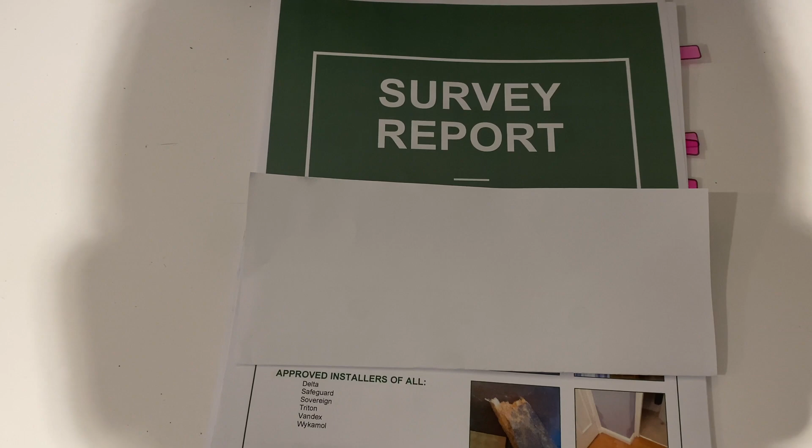So this is a copy of our client's report. I'm hiding the contractor's details because dobbing them in isn't what we're here for. It's quite a detailed report, 15 pages long. Just a few things we noticed before we've gone out to the property. First, they diagnose rising damp - overcome problems of rising damp, blah blah blah blah blah. And then a few other bits and pieces where my tabs are.

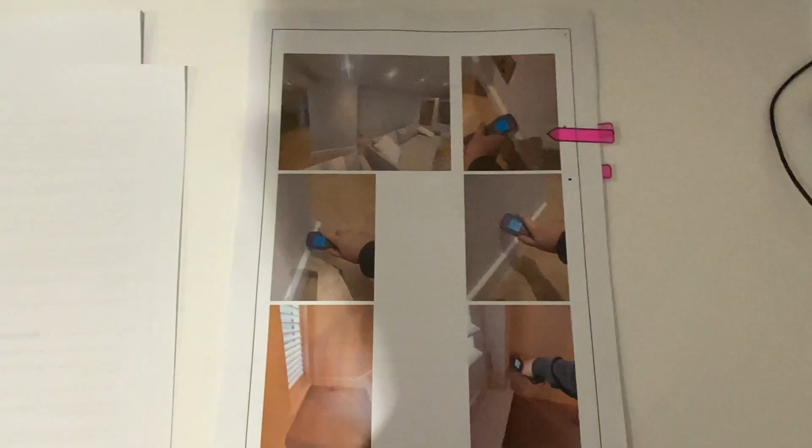We've got some photos where the chap's put pin probes in the wall, and he's got quite high readings on those pin probes, so that's cause for alarm. We need to look at that. What else have we got? A quote for rising damp remedial works.

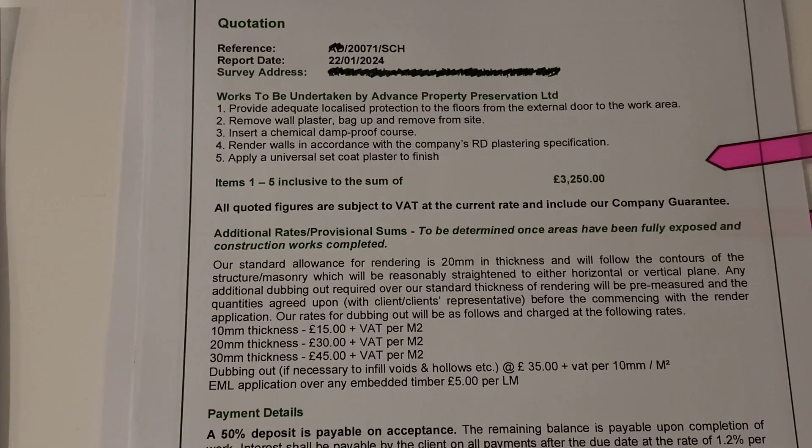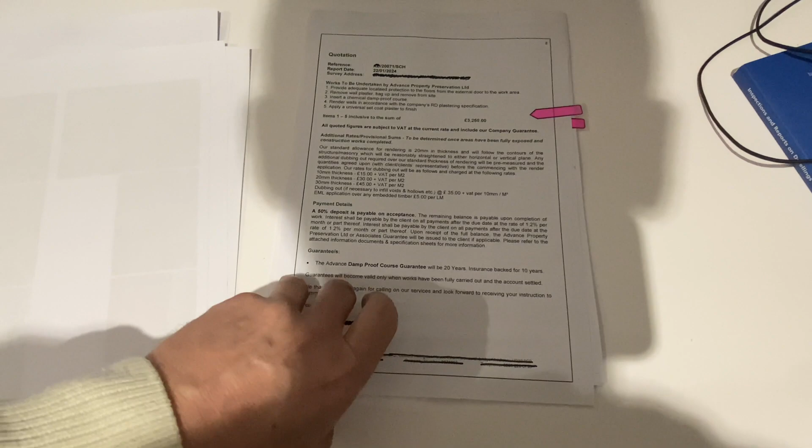So this is going to cost our client £3,250 plus VAT. Hang on, I've got a calculator here, my maths isn't that good. 3,250 times 1.2... £3,900. And on the final detail page, we're going to do a chemical damp proof course all the way through there and replastering. There's also 2 vertical damp proof courses going in, so we'll have a look at that as well.

So let's get to the property and have a look.

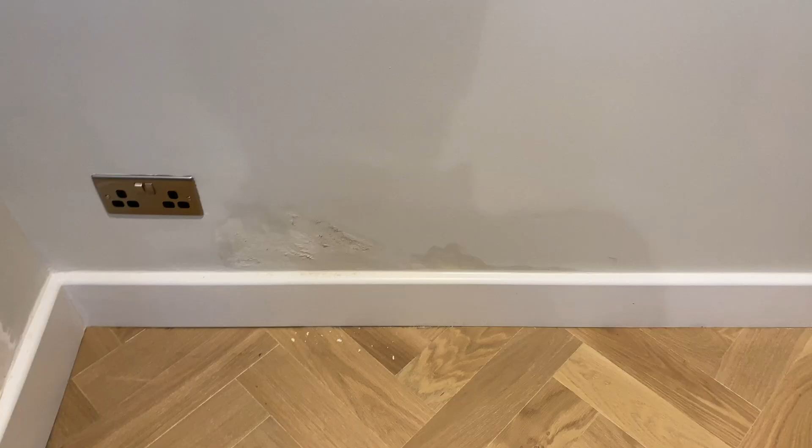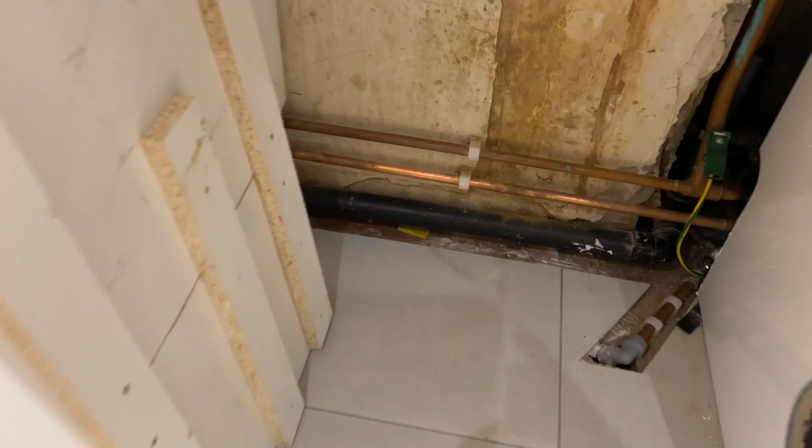Looking at a damp issue, low level, just in this location here. And someone at some point has come along, stuck pin probes in the wall, and it's revealed high levels of damp. And the other side of the wall, where the utility is, similar kind of issue.

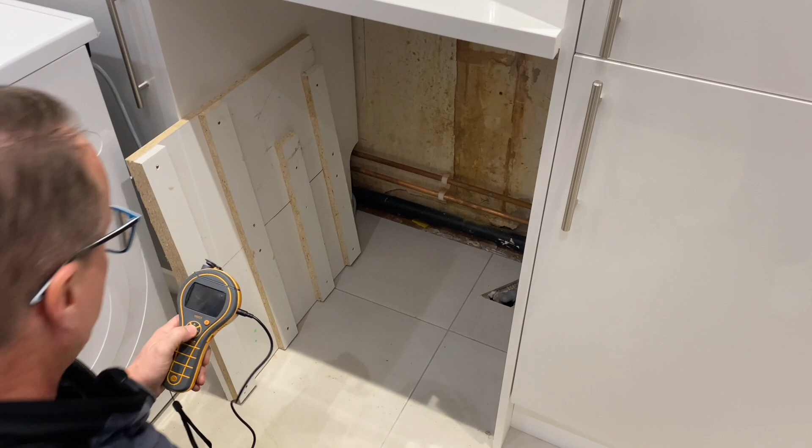So let's get the pin probes out, and we'll just start some general scoping about first of all. So let's get this turned on - pinless moisture meter. Okay, generally relatively dry, not too bad. Elevated, and then really quite high.

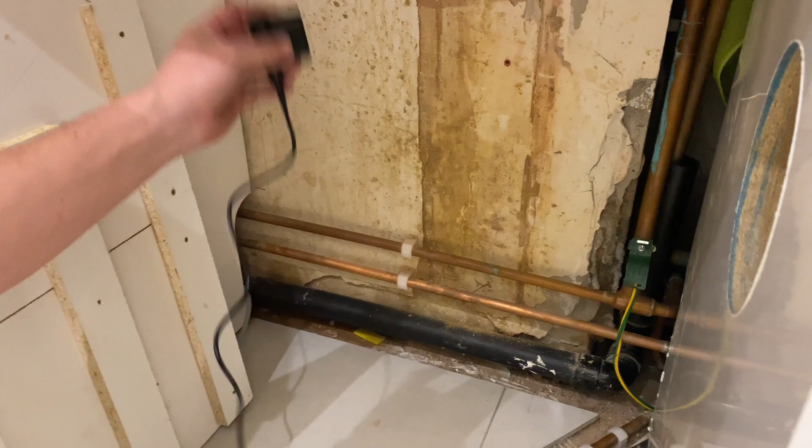So let's stick our pin probes in, see what kind of readings we get from those. Elevated, again elevated and really quite high. And there's quite low. The most accurate readings we'll get on these is when it's low, because there's no conductivity at all. This pipe work has been tested, so it's all leak free. But just as a little demonstrator here, this picks up electrical conductivity - if we put it on something that's conductive, it immediately comes up 100%. But I don't think that pipe's wet.

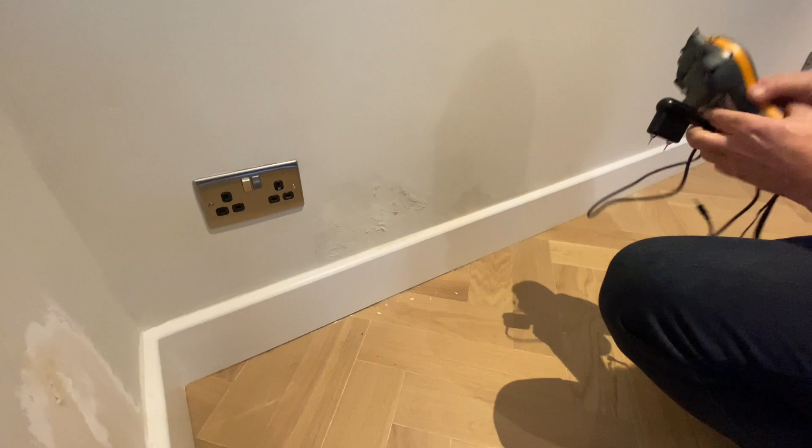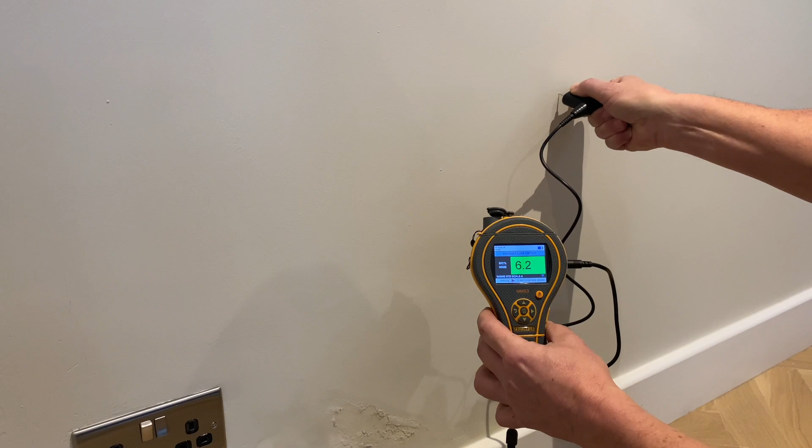So let's wander around to the other side, do a similar kind of thing. On the pinless moisture meter, an area we know to be relatively dry. Get down into this problem area here, and it's coming up very high. Again, really quite high, and on that side wall, again, really quite high. So we'll pop the pin probe on this too. Dryish area, not even picking up anything. And then down here where we've got all this wet, and on the side wall, someone's actually done a bit of a repair there - that's actually not too bad.

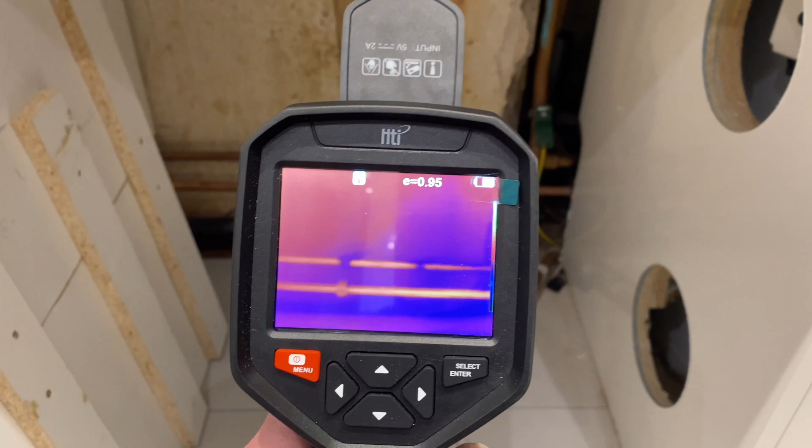Okay, so that's step one, just having a general scope about all that. Next thing we're going to look at is thermal imaging using this HTI HT-H8 thermal imaging camera. Just looking at it generally at the wall, we can pick up the gap there actually, and then the pipes, and we can see there's maybe a cooler area in the middle. So I'll get a picture of that and we'll store that picture.

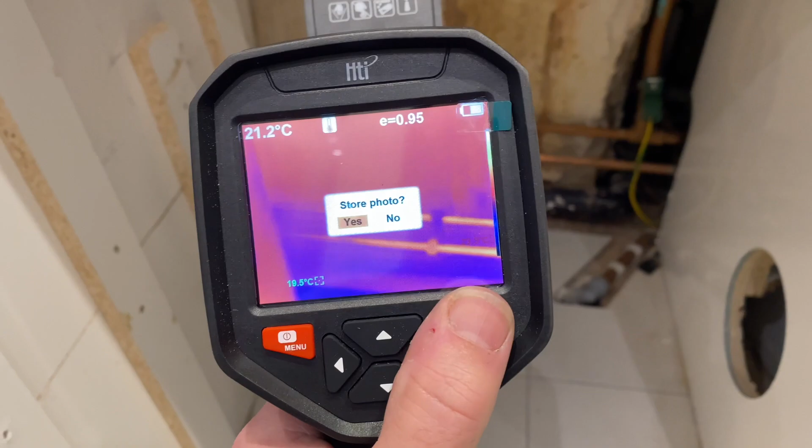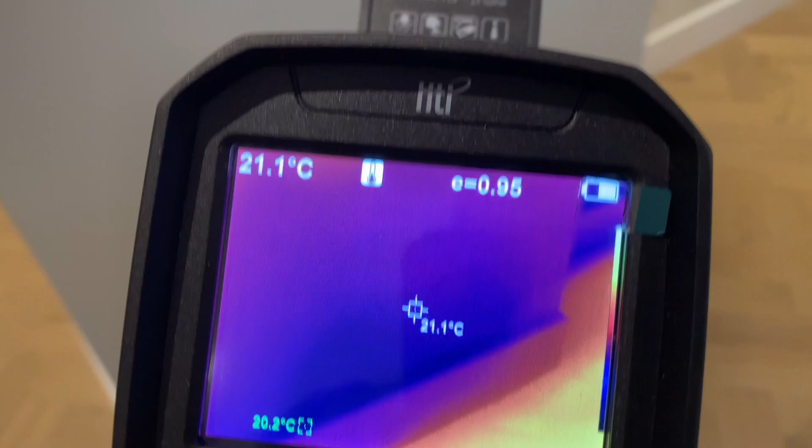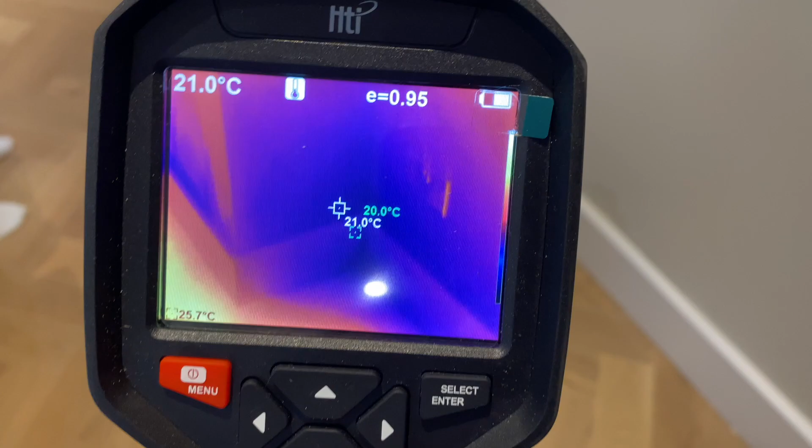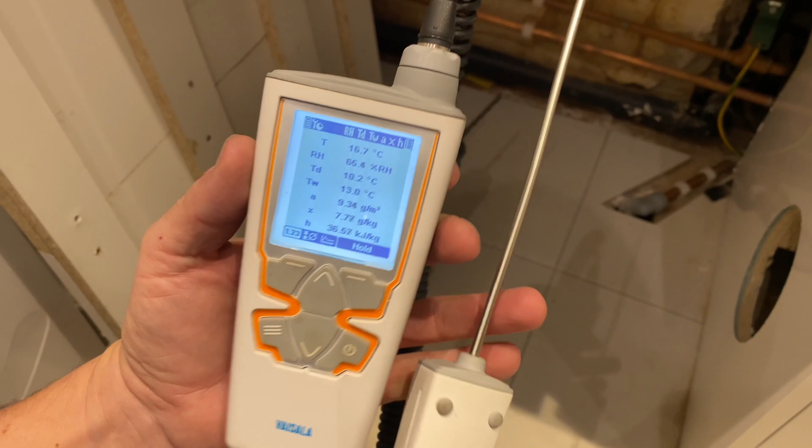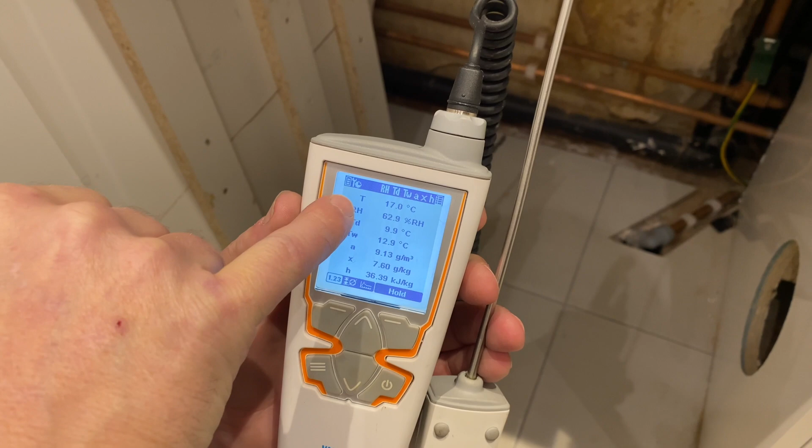Okay, so next step is to take some hygrometer readings. This is the air temperature, it's starting to just settle slightly. Obviously, the longer we can leave it, the better. But relative humidity is around 65% and falling at the moment. As I said before, our temperature is 16.9 degrees. Relative humidity is the humidity at, in this case now, 17 degrees. So at 17 degrees, our air can hold 62.8% of the maximum moisture it can hold at 17.1. Our actual moisture content is 8.97, so that's not going to change too much. But we'll drill into the wall and see what readings we get in the wall.

Pop this little seal on it, which seals around the opening. Do a high one.

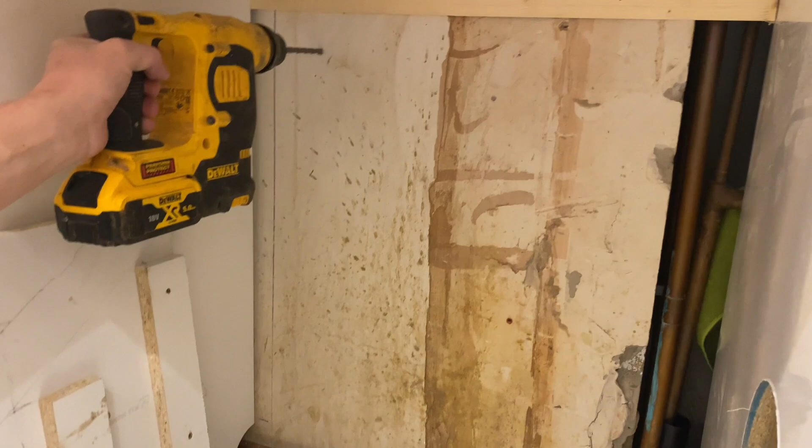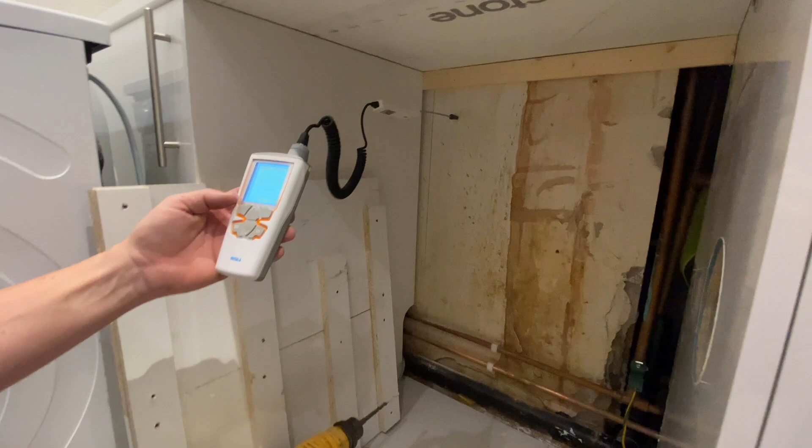Again, I'll do it in a couple of places, yeah.

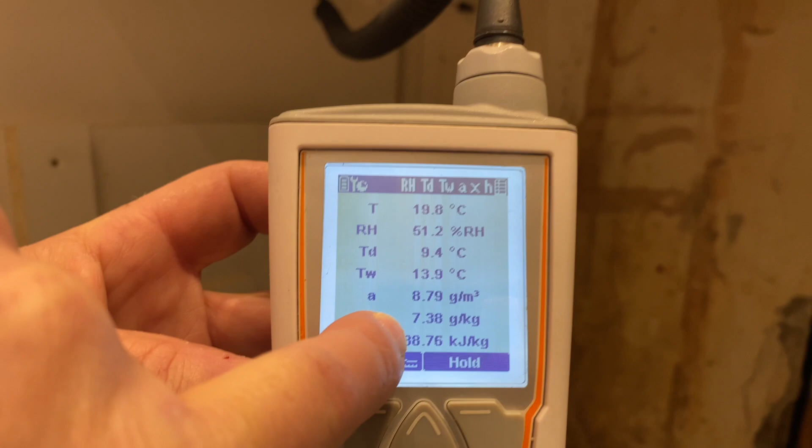So, readings at high level: we've got 19.8 degrees, holding 51.2% of its maximum moisture content. But down here it's only 7.38 grams per kilogram of air, which we consider dry. As you can see, that's up a little bit at high level, away from where we've got our issue.

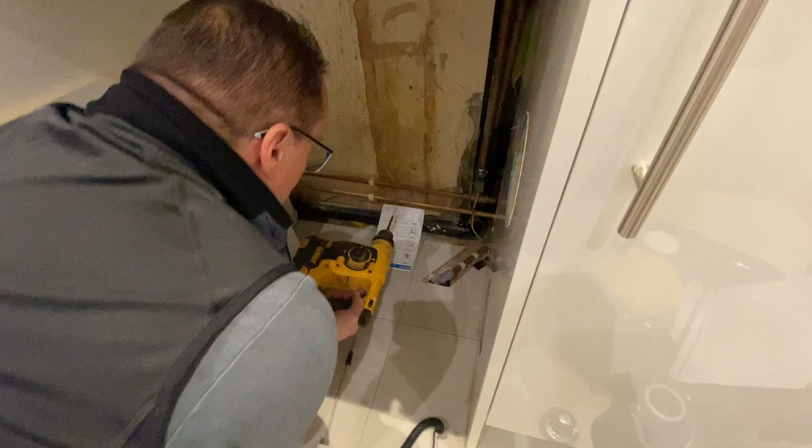So we'll now do the same at low level. Stop there, drill down to where we've recorded damp. Capture as much as I can for our carbide, and then we'll get the damp probe in there as well.

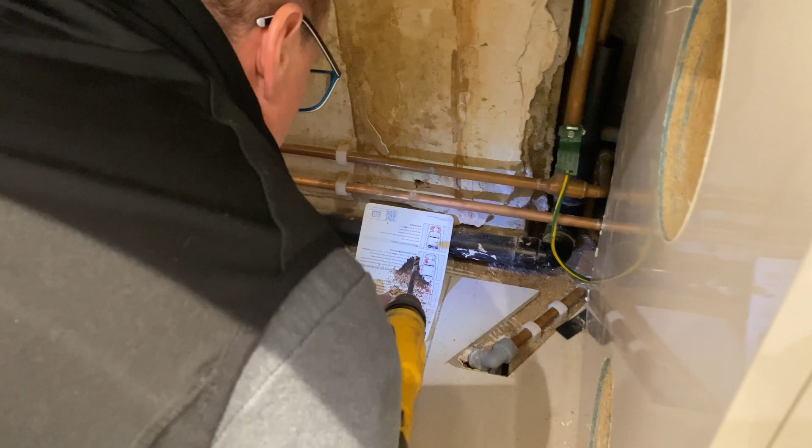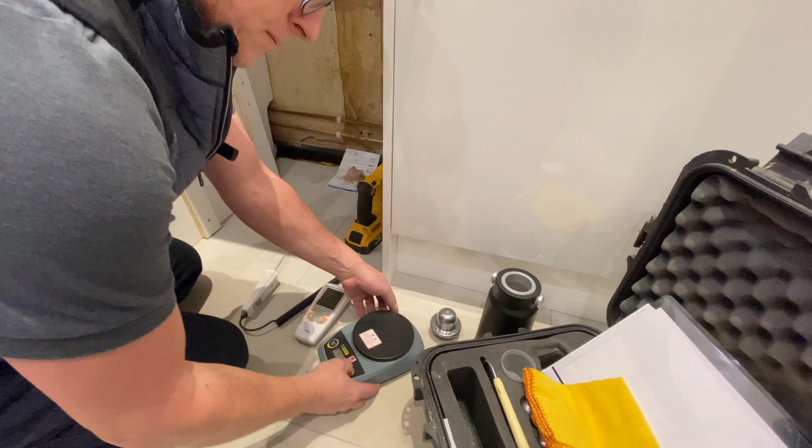Okay, so let's just check before I stop drilling. I need to check we've got enough dust for a start, so I need a 6 gram sample. Almost halfway there.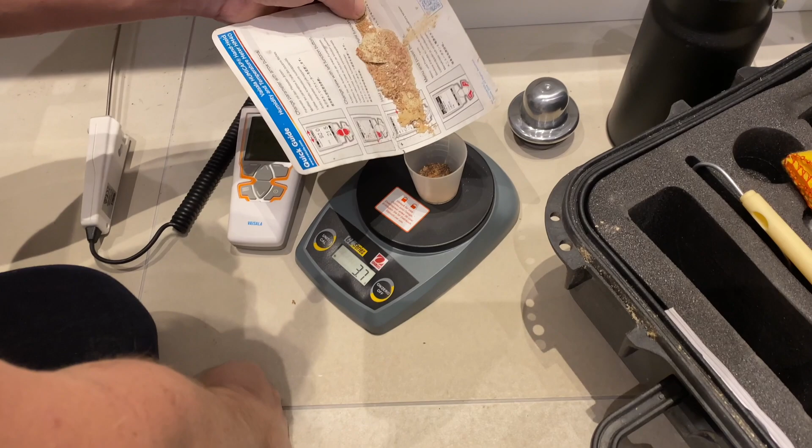What's coming out looks to be very dry and powdery, but the test will confirm it. It's 7 grams, that's plenty. So I'll get the hygrometer in there so we can see what that's recording.

Oh, come on. I think the batteries might be getting a bit low in this. Okay.

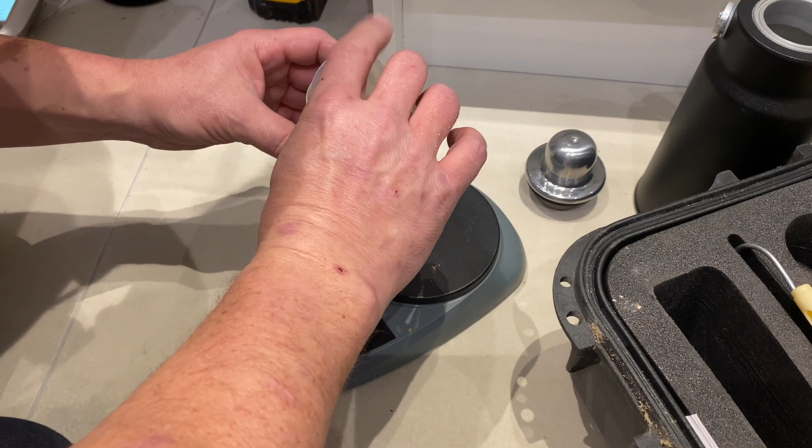So let's get our 6 grams in there. 6.6. 6.4. 6.2. 6.1, okay, pop that into our chamber.

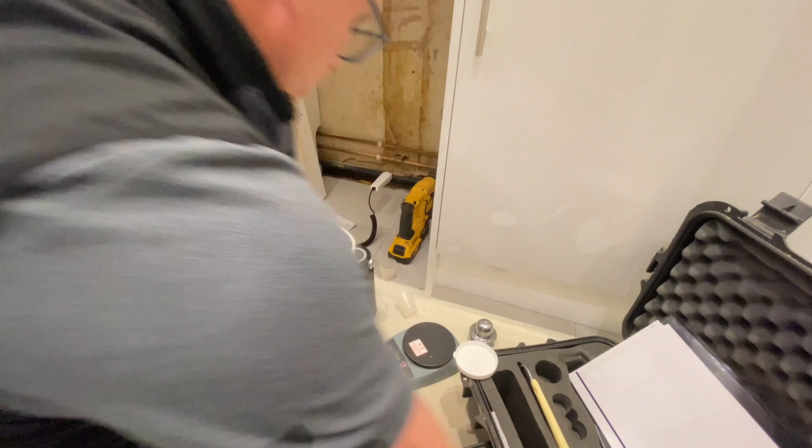Pop a couple of balls in there as well, steel pulverizing balls. And we'll do some scoops of carbide, which go in the lid, because the carbide reacts with the water in the sample and produces acetylene gas. And what that does is, if that starts its reaction too soon, we'll lose gas and get a false low.

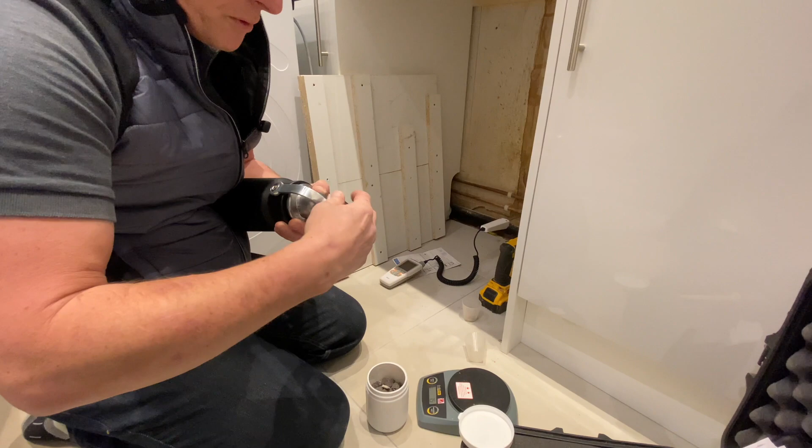So we've got the sample in there, carbide in there, get those in separate. Make sure that's done up. Lid on the carbide.

Okay, so I'm just going to leave that because this is the smaller chamber compared to the one we've done before. We'll get everything down in the lid, and so that starts to react.

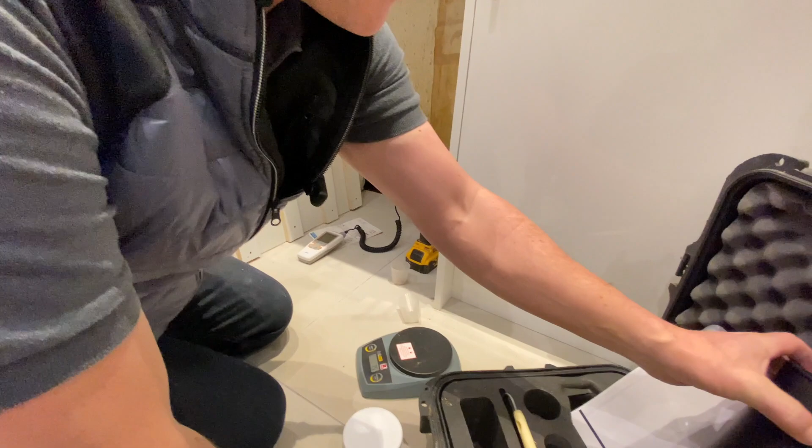But we'll flick over and we can see at a similar temperature, now we're up to 10.7 grams per kilogram. So it is slightly damper at the bottom for whatever reason, but our carbide test is going to give that as an absolute definitive.

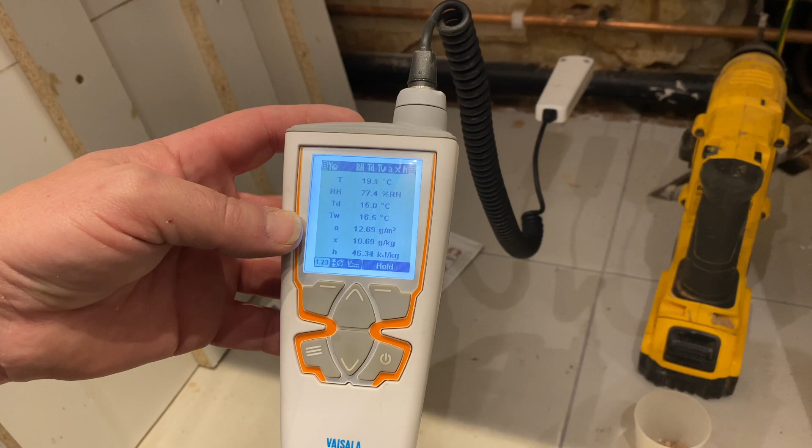So after 10 minutes, we can see our moisture content is 2%. It's a clay brick, I would consider that to be dry. And if we look at our actual sample, again you can see it's quite dry.

So we'll now do the same on the other side of the wall. Okay, so now we're doing the same on the other side of the wall. Let's go where it's at its worst.

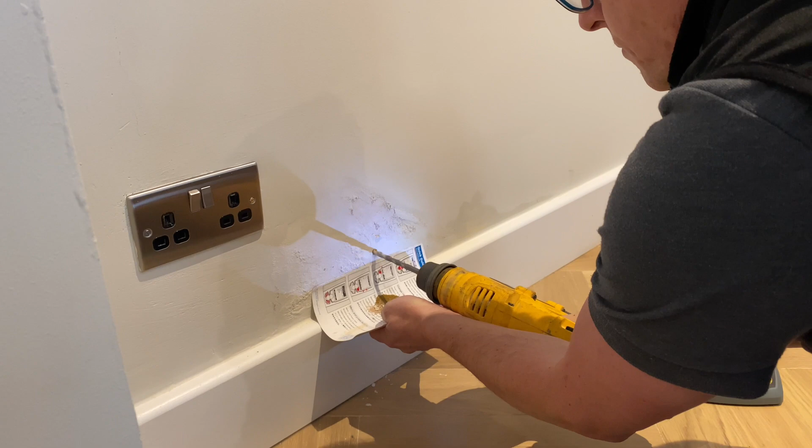Just keep that for a moment, I'll weigh it in a second. Let's just weigh it now. Okay, scales are zeroed. Oh, I'm only halfway there again.

5.9, a fraction more. There we go, 6 grams. Lovely, right, let's get that in the wall.

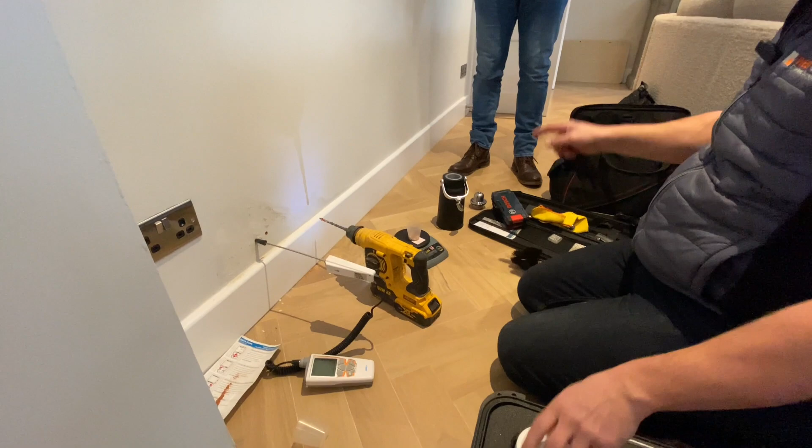Taking a reading while we're doing this. Why? Because 3 scoops of that equals 6 grams of sample, so it has to be exact.

So we put our sample in the chamber, and as it went in it looked absolutely bone dry again. Some crushing balls, and we've got to keep that separate, because if we put the calcium carbide in with that, it will start reacting straight away with any moisture.

Then it's not pressurizing the chamber because the pressure's coming out. So it should normally be 2 scoops of this, but because it's come in rock form, there's loads of air gaps, so I'll do 3. Some of these are quite big.

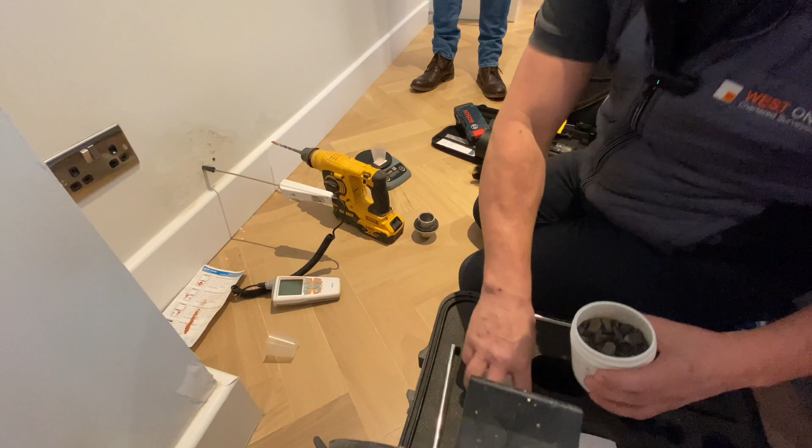I'll do 2.5. And then once you've pressurized it and you take the pressure off, you hear it as you release the pressure, and it absolutely stinks.

So we'll get that in there separate to that. Yeah, nice and tight. At the moment it's 0.

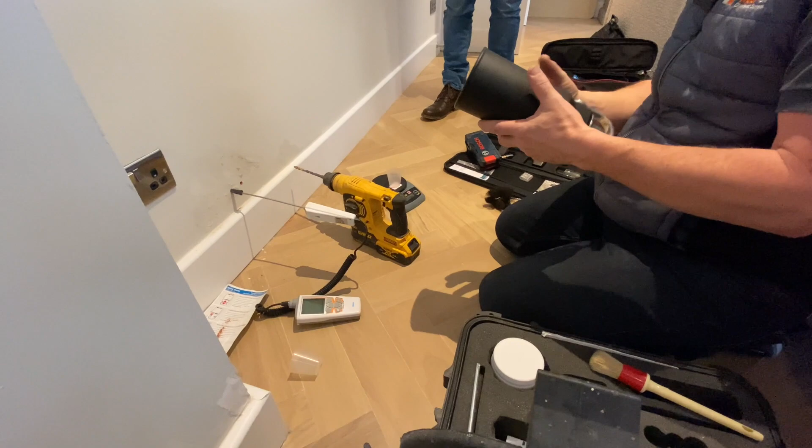Okay, and then we leave it. It's only a little, we've got 2 chambers. One's got a big bulb in the middle, so we can leave that flat because it'll settle in there. But because this one hasn't, you've got to leave it that way up.

I was wondering why you left it. I was on about it a minute ago. So it's all going to come out.

Yeah, so everything's exactly the same process that you used in there. Yeah, yeah, so you're just again measuring the amount of dampness in the brick itself.

Yeah, absolutely. And I'll send you a link, I'll do a YouTube video on this, because I find it interesting. I was only taking a minute.

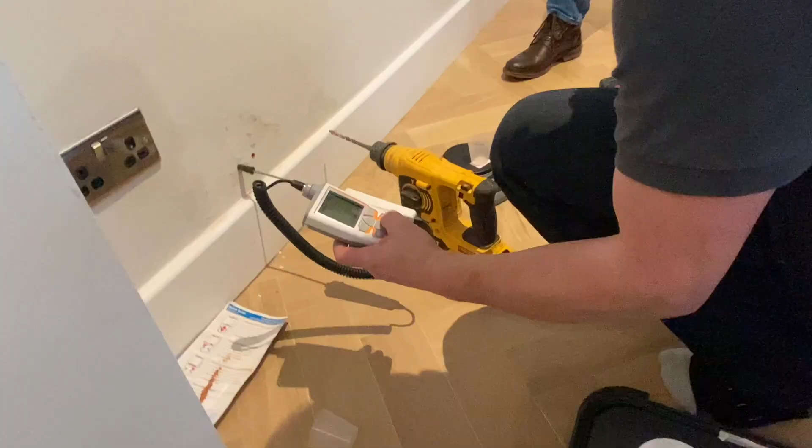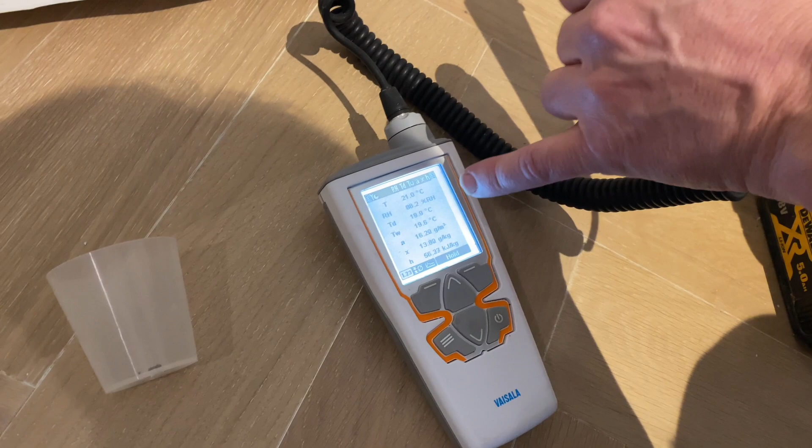Okay, see that there, same wall, is actually reading quite high. It's 88% relative humidity at 21 degrees. So at 21 degrees, it's going to hold a lot more moisture than it would at 11 or 12 degrees. So 88 at 21 is quite high, but our grams per kilogram at 13.8 is also quite high. So it's interesting, I'm expecting a slightly higher reading this time. We'll see.

Okay, after 20 minutes, slightly elevated. But I'll come back to the reason why, because it's the same wall, the other side was getting 2%.

Okay, so because the acetylene gas has produced a pressure, when we undo it, there you go, you can see the relief of the pressure buildup.

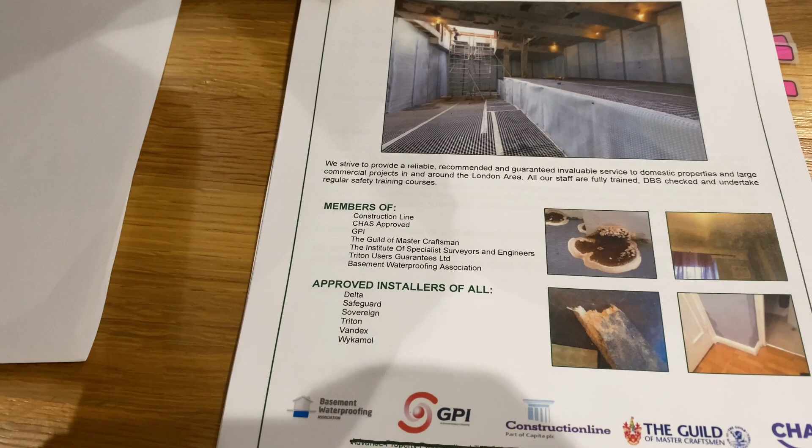Back from the property now, so we'll have a bit more of a look through this report that's been provided. Page 1, lots of information there showing how good they are, all what they've done, member of lots of associations, approved installers of lots of chemicals and bits and pieces, and members of all these trade organisations. So it implies that they're very good and they know what they're doing.

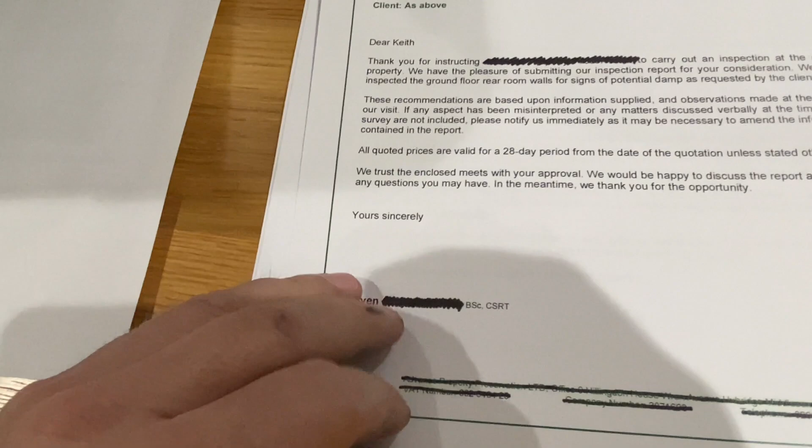So Steven undertook the survey. Don't know who Steven is. He's got a degree, not sure what the degree's in, and I don't know honestly what CSRT is. But I think that's probably fairly irrelevant.

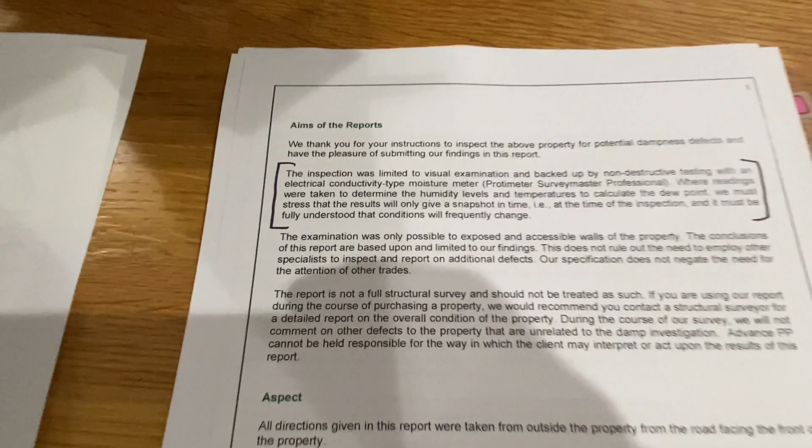The inspection was limited to a visual examination, backed up by non-destructive testing with an electrical conductivity type meter, Protimeter Surveymaster Professional. Our client didn't ask for a visual examination, he asked to find out what the issues were and what needed to be done. So this chap has chosen to just stick a pin probe in a wall and then diagnose, was it £3,900 worth of work on the basis of that? I don't think that's acceptable myself.

It's a bit like a doctor saying, yeah, I can see that you've got something wrong with you, we're going to need to take you down, do it privately, and it's going to cost X thousands of pounds. You'd want further tests, you would want to know exactly what's going on.

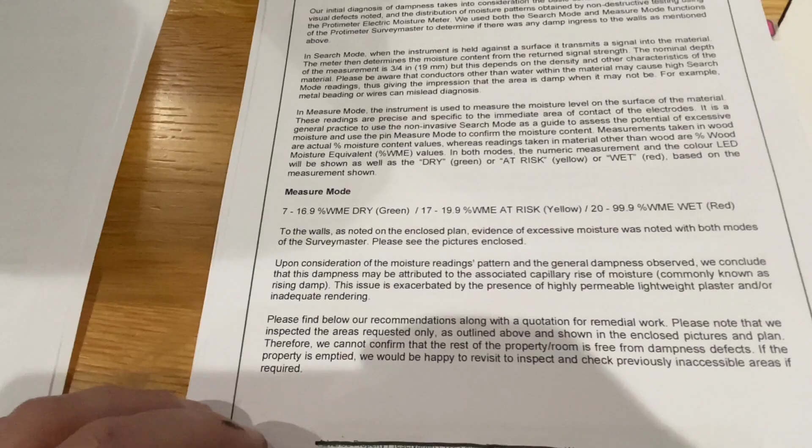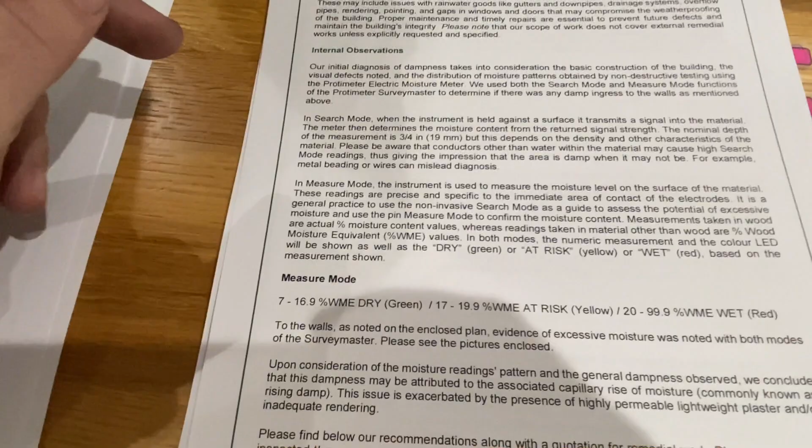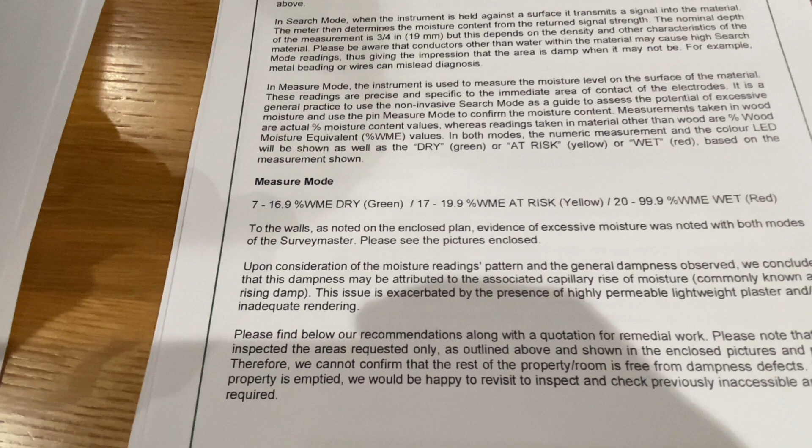So we move on to the next couple of pages, lots and lots of waffle, lots of words without saying much really. It goes on to external defects can lead to this, could do this, possibly that. Observations, it tells you about the search mode of the damp meter and what the different readings mean, and it uses this term %WME, percent wood moisture equivalent. That is generally considered to be that if a piece of wood was fitted to that damp area of brickwork for a prolonged period of time, that's the moisture content it would eventually read.

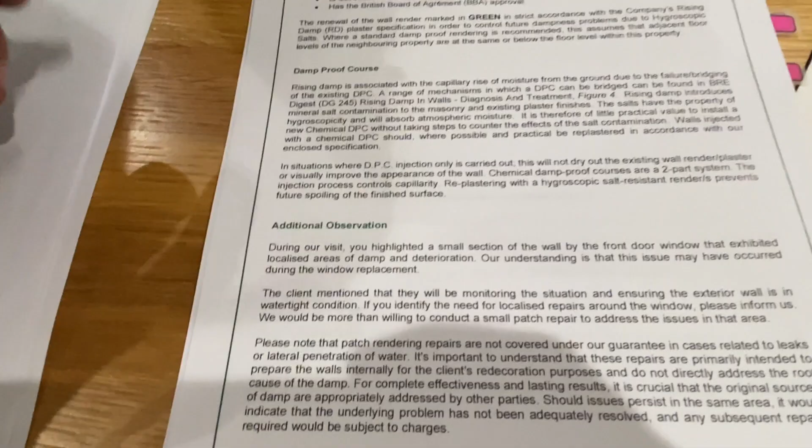So we carry on, we move through, and again it references BRE Digest 245. Well, BRE Digest 245 says that you should use more than one method of determining or recording damp readings, not just be reliant on one. It also says, literally in one of the first paragraphs, that damp proof courses rarely fail. So it's a bit interesting that this one concluded that it has.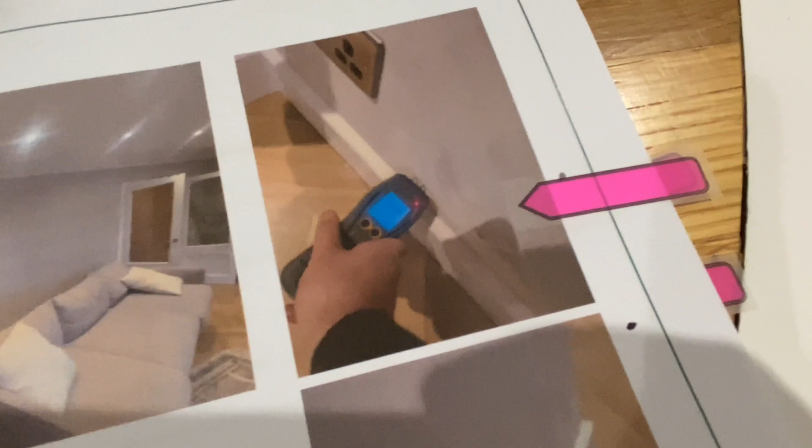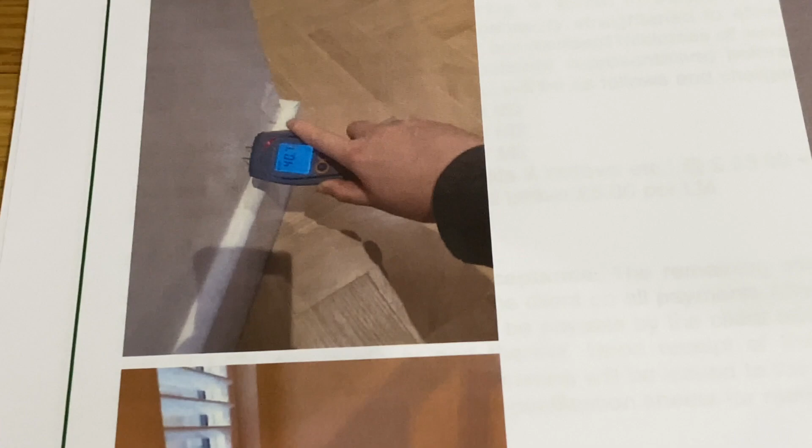We go on to, basically this is all geared around recommending a chemical damp proof course, but briefly I showed you some photos, so let's look at these in a bit more detail. This photo here, to me it's quite clear, all the way around here, this is all salts on the wall, and he's got a high reading there of 44.5. Salt is highly conductive, and I mean highly conductive, so it's hardly surprising that you're going to get a high reading if you stick a pin probe directly into salt. And again here we've got another reading of 40.7, again there's salts on that bit of wall, so it's unsurprising that we've got high readings.

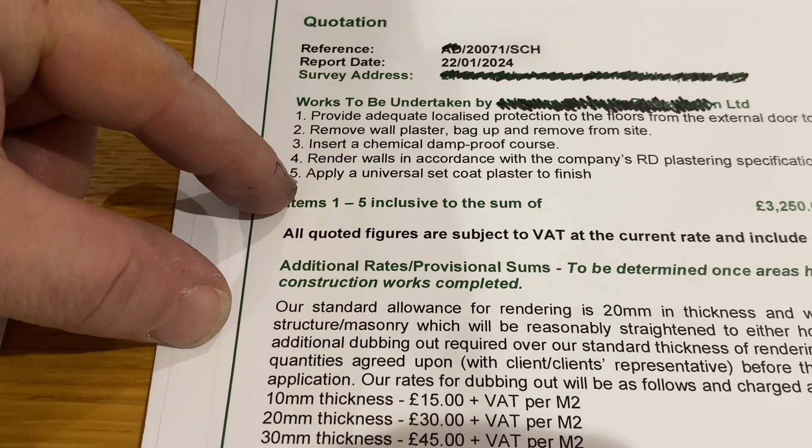So unsurprisingly, we come to our quote section of the report. £3,250 plus VAT, so I think we established that was £3,900. And what are they going to do for that? They're going to provide protection, remove the wall plaster, insert a chemical damp proof course, re-render the walls using RD's plastering specification, and skim finish it.

If they find out there's more plastering to be done, then we've got some rates there for additional work.

It's a 20-year guarantee, but only 10 years is insurance backed, so I'm not entirely sure why they're offering a 20-year guarantee, because this company may not exist in 5 years time. Therefore we're down to our 10-year insurance backed guarantee.

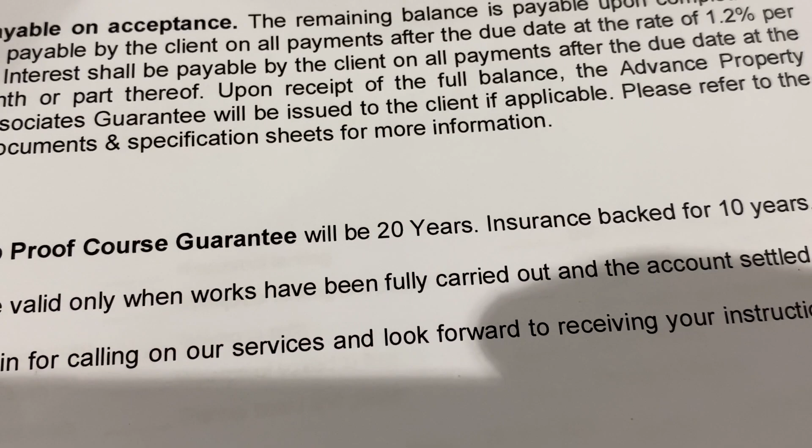I might do a bit more of a video on these guarantees later, but the guarantee is for the product, not the manner in which it's been installed.

And here's a picture of the rear of the property. Actually, it's inside - there's a utility room here. We come through the front door here, staircase. And why you'd put a vertical damp proof course on an internal wall, I do not know.

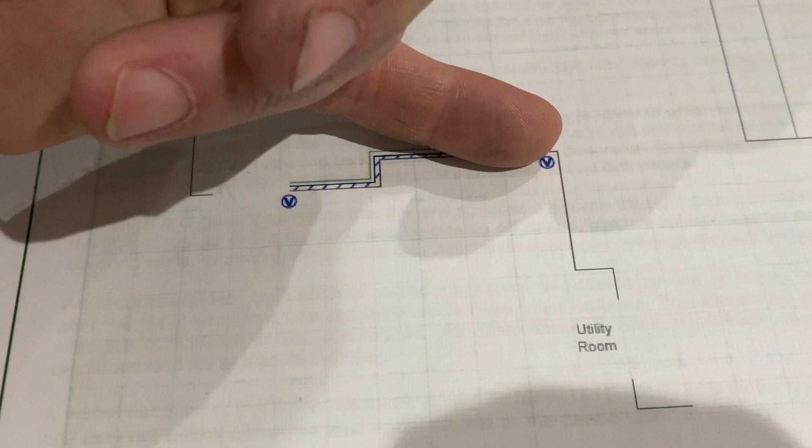And likewise one on the door liner, and lots of replastering to be done. So the rest of it then is just general waffle and a few other bits.

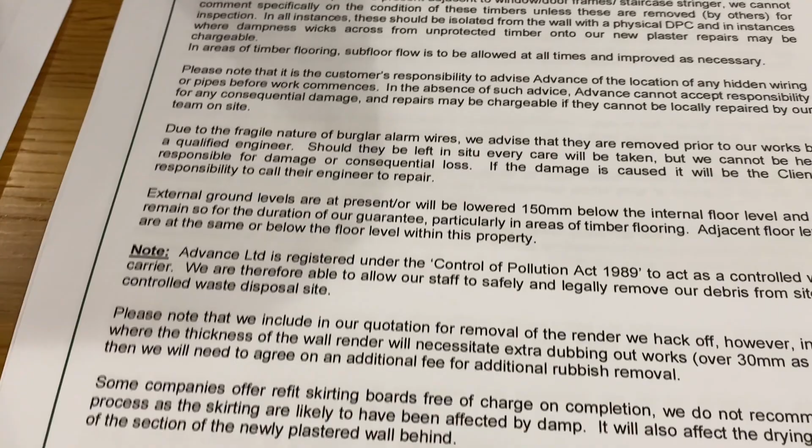It does actually refer to a British standard, which is really quite interesting, because that British standard then goes on to state that in examining a property for rising damp, you should consider all other areas of damp, sources of moisture or sources of dampness.

And this report doesn't do that once, so it's contradictory with the own regulations and British standards that it's referring to.

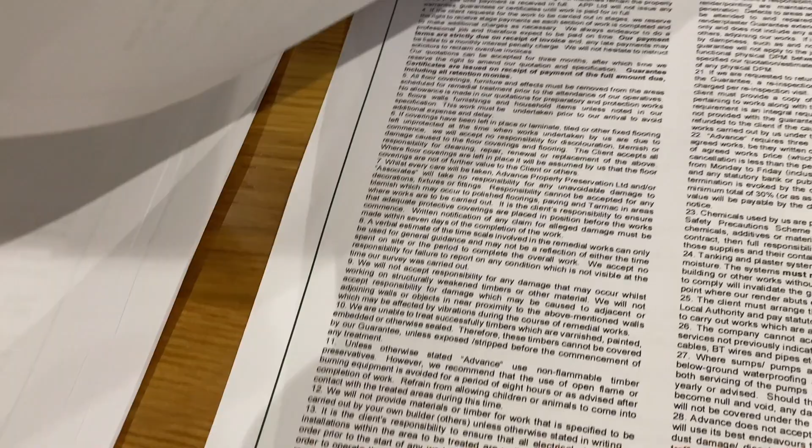And then finally we've got our terms of contract in the back of the document - a bit poor quality. It's 2024, and people are still wanting to do chemical injections on damp proof courses. I don't think that's acceptable, but hey, that's only my view. Make of it what you will.

What we've established on this job is that the wall hadn't fully dried out before new plastering was applied to the wall. And the contractor said, look, I think we've just plastered it a bit too quick.

So as the wall's dried out, it's just pulled some salts with it. And with the salts comes a bit of a vicious circle.

So once you get salt in a wall, it's hygroscopic, so it attracts moisture from the air. As it attracts moisture from the air, it pulls that into the render, which makes it more wet, which can pull out more salt.

So you've got more hygroscopicity, whatever you want to call it, working there, which pulls in more moisture from the air, which creates what looks like a bigger damp problem than you've actually got.

So it's a fairly basic fix. The contractor is going to take a small area of render off, dry it out and re-render it. It won't be a problem at all. Most definitely doesn't need a chemical damp proof course.

And as we saw on the carbide readings, although one side of the wall was slightly elevated, the other side of the wall was absolutely bone dry, yet they want a chemical damp proof course the whole way through.

So I hope that's provided a bit of entertainment, bit of fun, bit of knowledge. In this particular circumstance, chemical damp proof course was completely inappropriate, absolutely not required.